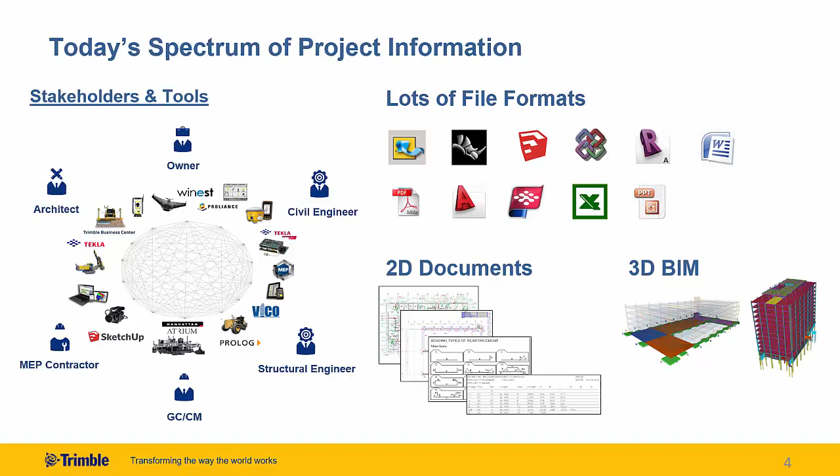To expedite the flow of information and prevent rework, companies are seeking to digitally exchange data between their tools. With so many tools, file formats, and levels of information in place, it oftentimes becomes complex in organizing and troubleshooting this process, and then the value gained through digital interoperability is reduced.

Trimble Connect minimizes this inefficiency by driving data to a central location on the cloud. It also simplifies the process of sharing between project stakeholders through direct integrations with their tools. Rather than managing the import and export of files, data is simply published and consumed through the Trimble Connect project collaboration service.

The other major benefit with Trimble Connect is that documents and information can now be accessed by all project stakeholders anywhere, anytime, and on any device. Whether it is a designer working on a desktop, a project manager reviewing clashes on the web, or a field superintendent directing construction, installation, and asset management on a tablet with the assistance of a 3D model.

So let's take a look at this process in action. So here we're in Trimble SketchUp or Autodesk Revit, and the architect is progressing through his architectural design of the job. He can then open up within his own application a connection to Trimble Connect and publish his model.

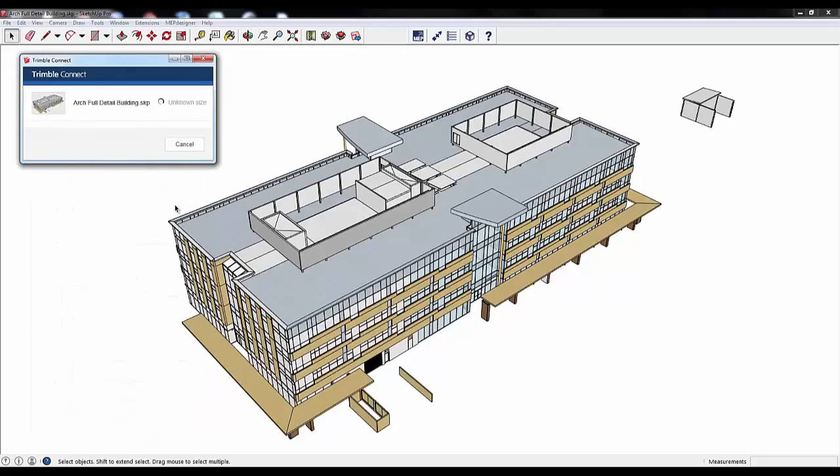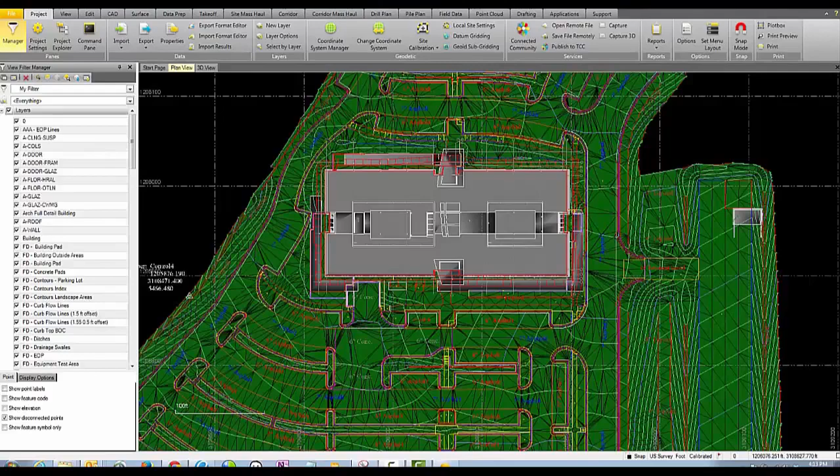We then come into Trimble Business Center, where we can reference the architect's model and overlay it with the project's topography and geospatial information. The architect's model is only a reference and can't be modified by the civil designer. It only acts as a reference for coordination in his own software that he's familiar with. He can then also publish his civil model out to the Trimble Connect cloud for sharing with other project stakeholders.

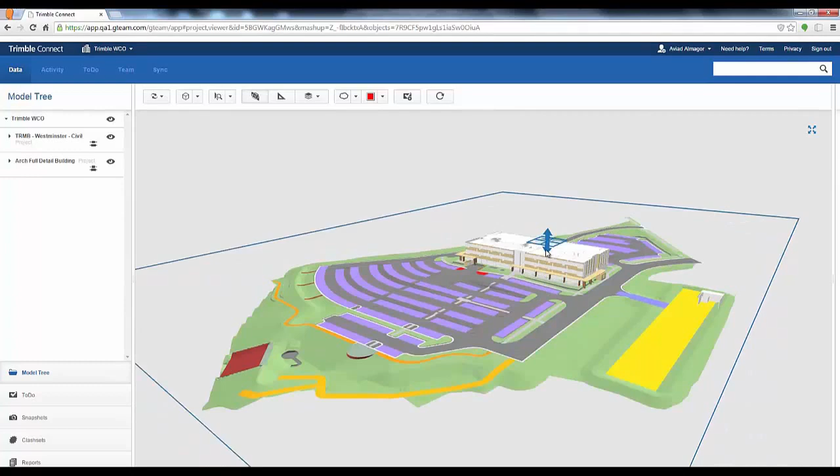Back in the Trimble Connect web interface, both the architect's model as well as the civil model can be viewed and overlaid together without installing any additional software. The model can be easily navigated and then even commented on by any project stakeholder. Clouds, annotations, and measurements can easily be done at any level of detail in the model.

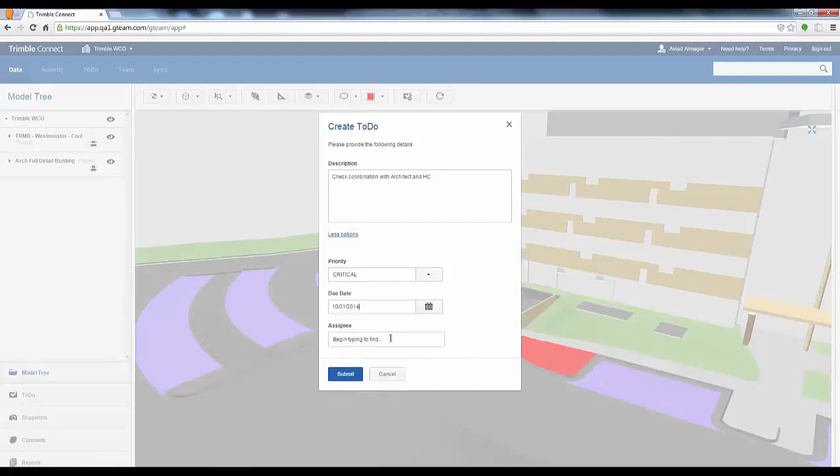These annotations then can be assigned to a to-do action item and can be tracked and assigned to different project stakeholders. You can then easily select a to-do item in the list and then be brought into the exact location where that comment is in the model.

Here, the structural engineer is within Tekla Structures, and within his own software is connecting to the Trimble Connect cloud. He can then easily see the architect's model and download that as a reference. He can then control the visualization and colorization of that in order to easily lay out his foundations as well as other structural elements for the project.

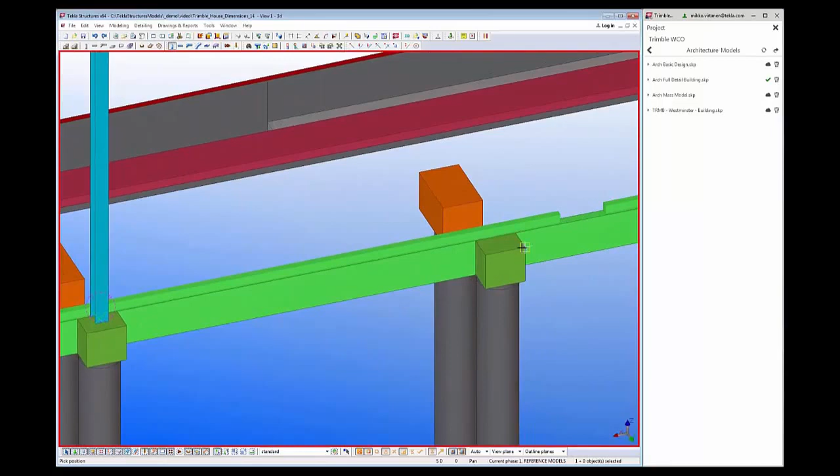The engineer can then progress with the design and layout of the rest of the structure and make sure that it fits and coordinates with the architectural model. Again, all of this done within his familiar software of choice. The structural model can also then be published back to the cloud to share with other project stakeholders.

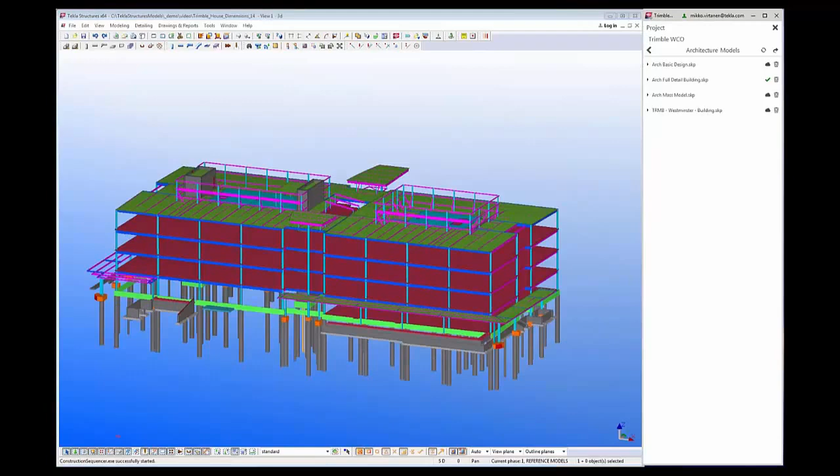3D layout points that were extracted from the building information model can then be downloaded from the cloud and easily used by the Field Link operator in locating and verifying placement of equipment in the field.

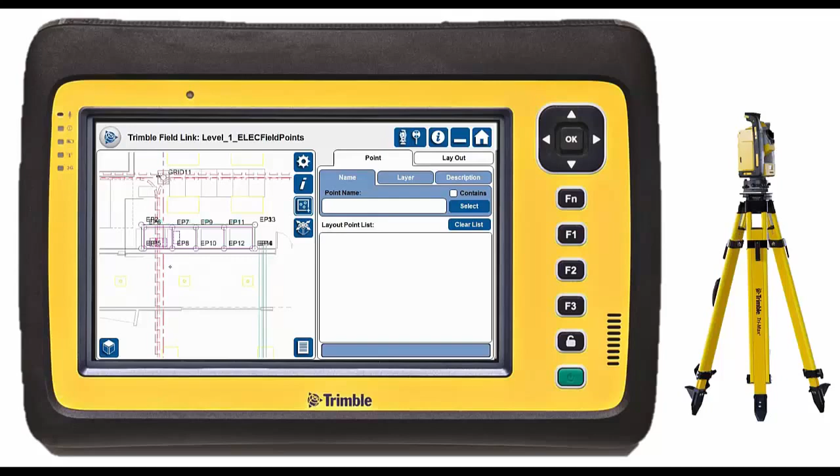So in summary, Trimble Connect reduces cost and expedites project schedules by seamlessly exchanging information between project stakeholders through the cloud. It allows software and hardware vendors and solutions to easily pass information between their different products, and it makes all of the information instantly accessible via desktop, web, or mobile.